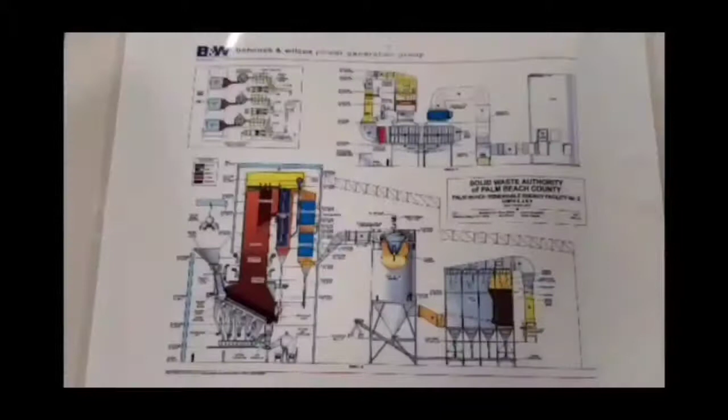Here's a diagram that we can use to explain some of the environmental equipment we have. So this is a side view diagram of our whole facility, starting with our funnel. Over here would be the pit, overhead crane, which brings in the trash, goes down into our hopper or funnel, where it's gravity fed down into our boiler.

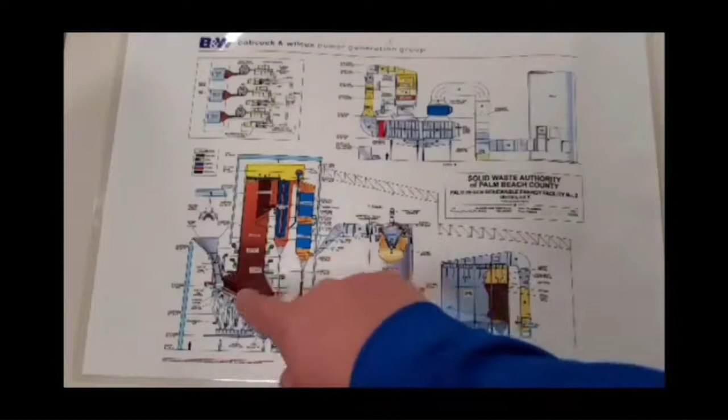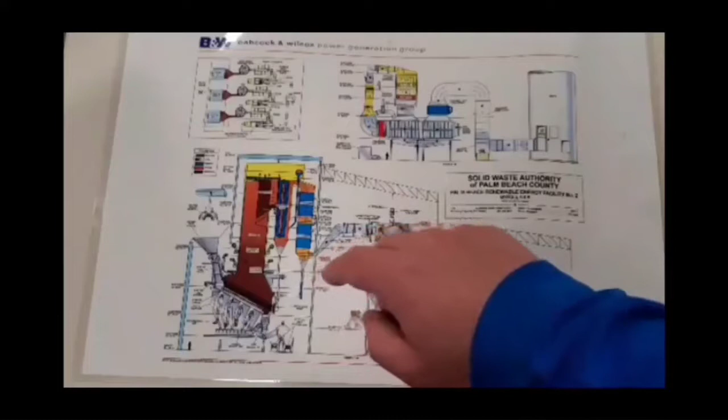And then in this general area here, we have our 2,500 degree fireball where we're combusting waste. We bring air from the tipping floor in underneath to provide the oxygen necessary for the fire. And then that heat and flue gas makes its way through these different passes and turns through our boiler, all while we're absorbing the heat from that flue gas, from the hot air being generated from the fire, through the metal piping in the walls, which is then boiling water and making electricity.

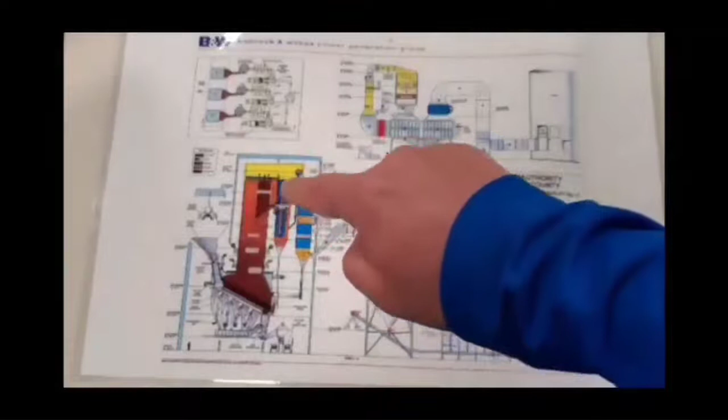All of the ash that's left over comes out here and is collected into our ash system where we can bring it to landfill, safely landfill it. If we follow the path of flue gas, we can see that it goes through here. Again, we're collecting the heat from it and eventually going through this portion of our equipment. From this point on, all of this equipment is environmental. It's all there to deal with what pollutants are generated when you burn trash.

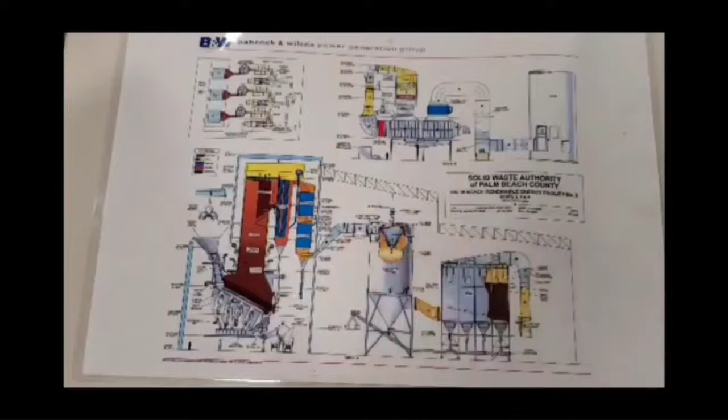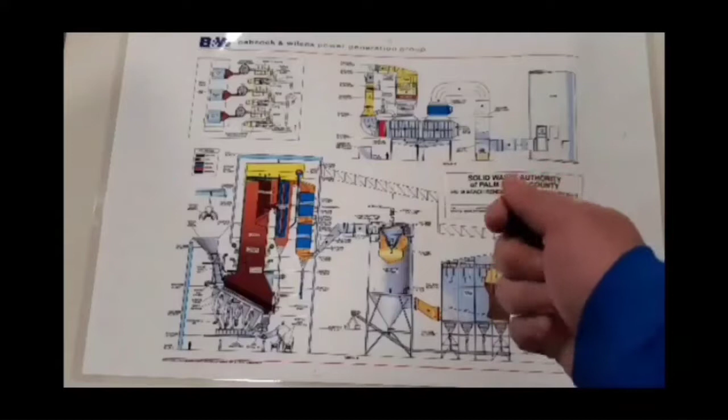So one of the first things we do is we inject a powdered activated carbon, which binds with mercury, so that we don't release that into the atmosphere and it can be safely landfilled. After that, it goes into our SDA, which is basically a big cylinder, and inside there is a fast spinning nozzle, kind of like a fancy sprinkler system. And what it does is it sprays in a lime slurry mixture, which is a basic element. So it has a basic pH.

And the acid gases, which are what's responsible for making acid rain, when you take something basic and acidic and you put them together, they neutralize each other. And that's what we're trying to do in here. So we're lowering the temperature of the flue gas. We're injecting lime slurry to neutralize acid gases.

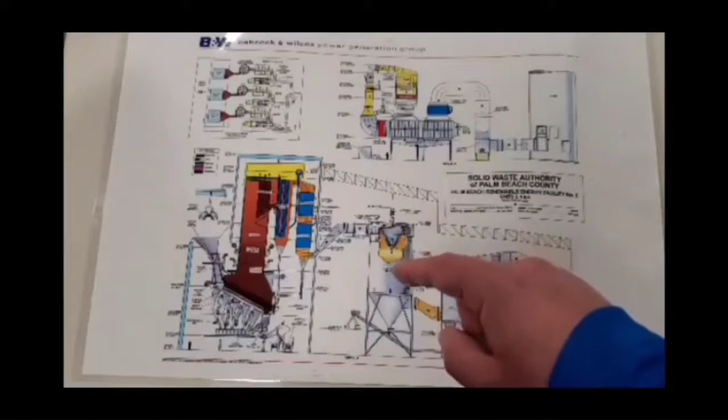And then from that point on, we're moving in and we go into our bag house. So this whole thing here is like a giant oversized vacuum cleaner. It has 8 compartments. Each compartment has... in total we have over 1,700 of these bags, and we'll show you a bag later on in another video.

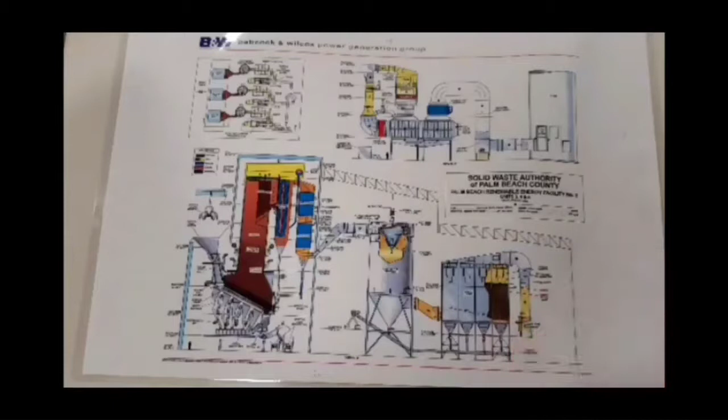And those bags are 2 stories tall, and they look like big cylinders. So the air gets pushed through them, similar to how a vacuum cleaner works. So any particulate that's in the air would get trapped by the filter and the clean air then passes through and continues on through the system.

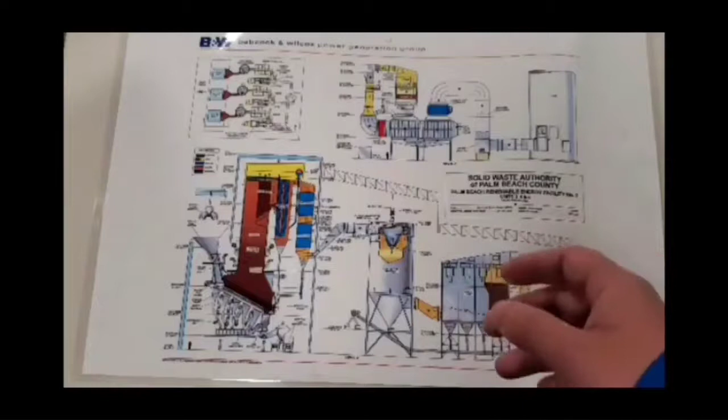As enough ash is generated and collected on the sides of those bags, they get kind of plugged up and the air can't push through as easily, so it creates a differential pressure, and we can measure that, and when it gets too high we initiate a clean, so it will reverse the airflow, and we'll fire sonic horns, which are like giant subwoofers, and that vibration from the noise helps shake the ash off, where it goes down into these individual hoppers and again joins the rest of the ash.

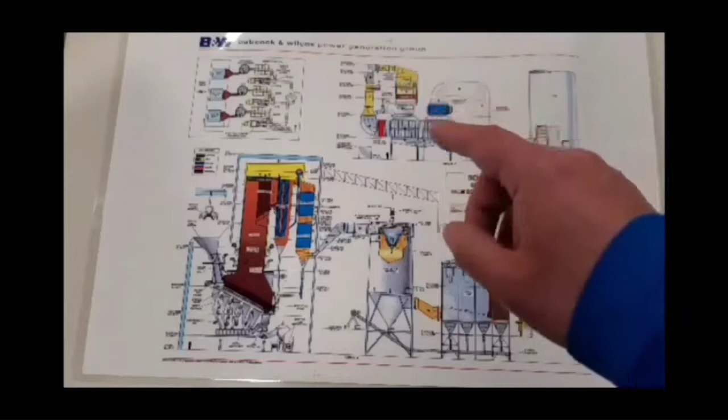After that, it goes through some ductwork and ends up into this section over here, if you can imagine the connection. And this is our catalyst system, which is unique to our facility. We're the only waste-to-energy facility in the country to utilize this. Very good, newer technology. It helps make us the cleanest waste-to-energy facility in the country.

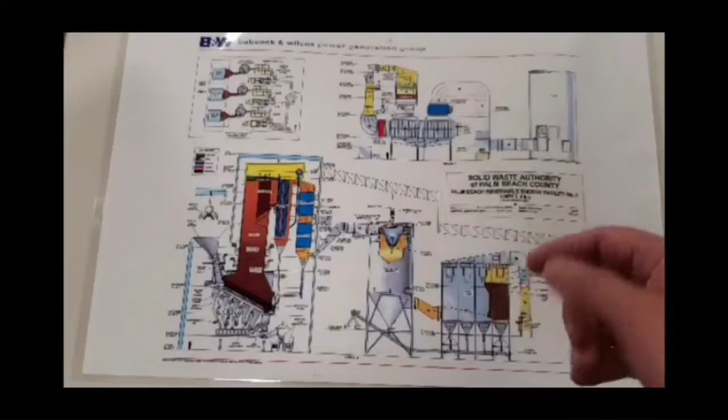And what we do is we spray in an ammonia gas, which mixes with the flue gas and goes through a catalyst, which is a special kind of metal in the shape of a honeycomb, vanadium metal, and some chemical reactions take place. And what we do is we break nitrogen oxides, which are dangerous to the environment, and we break them down into water and nitrogen, which are naturally occurring and not harmful to the environment.

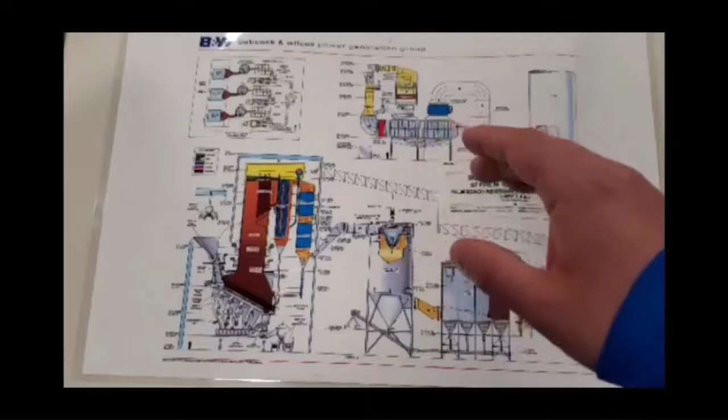So after it goes through there, we go through some series of heat exchangers just to try to recover some leftover heat and make the boiler a little bit more efficient. And then the last step we go through is our CEMS, or Continuous Emissions Monitoring System, which is a computer which takes a smell, so to speak, of the air that we're putting out of our stack 24/7 and makes sure that we're not polluting. And that gets checked by a third party in the Department of Environmental Protection to make sure that all of this stuff is working properly.

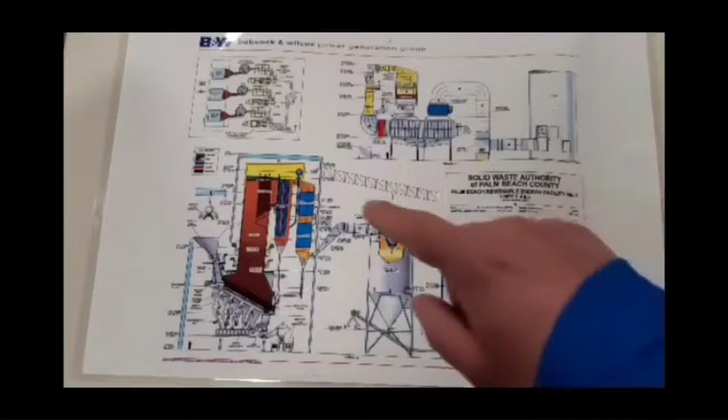And again, just up here in the corner, you can see that we do have the same exact setup 3 times. So 3 boilers, which means we need 3 sets of environmental equipment, and they're all identical. Great. So we'll go out in the field and we'll look at some of these things in person and see what they look like in real life. Thanks.

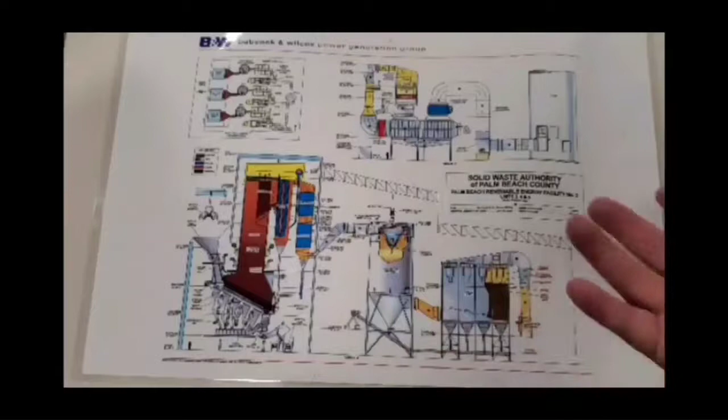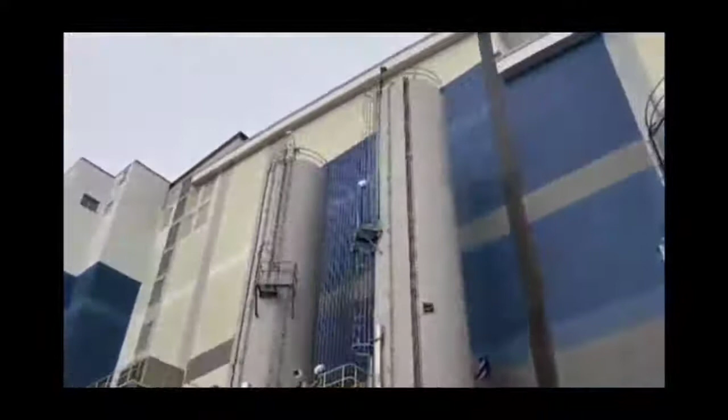All right, guys, so here's our chemical storage area for the facility. So as I said, we use some chemical reactions to take place to address some of the environmental concerns here. So first up here, we've got 2 silos, as you can see, very tall, that store lime pebble, and we then generate it into a lime slurry.

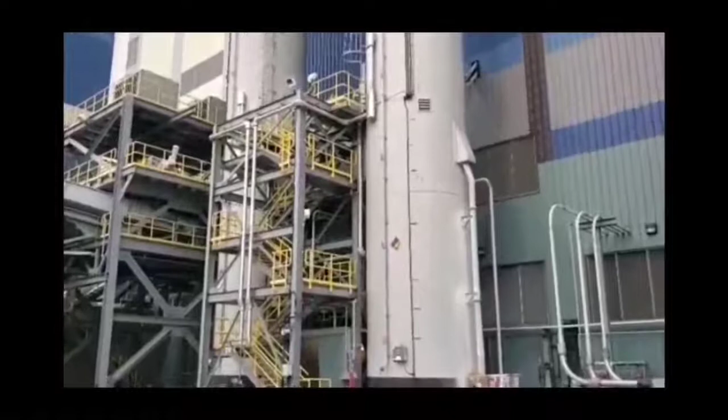So the top portion of these silos are filled with lime pebble, lime rock that looks kind of like gravel, and then about midway up where that platform is, we have a piece of machinery called a slaker, which takes that lime pebble, mixes it with water, basically agitates it, stirring it, and creating lime slurry. So we have a chemical reaction taking place to create lime slurry. And the bottom of these are lime slurry storage, which is a liquid now, where we can then pipe it up to those SDAs we looked at earlier, spray it in, and knock out those acid gases.

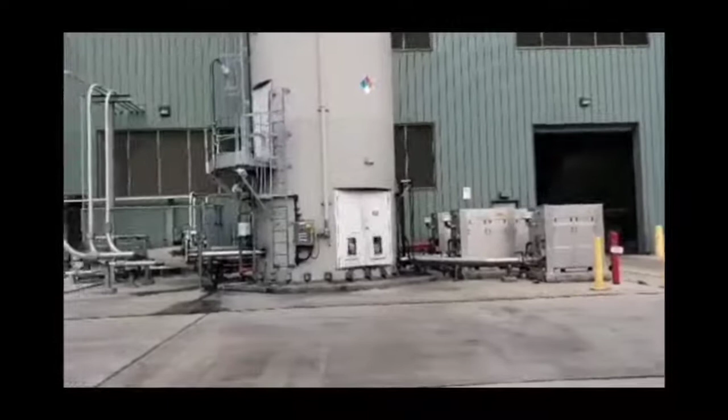Next up over here, this is our carbon silo. So this is where we keep our powder activated carbon, and then we use some air compressors over here, and we actually blow that up to the top portion right before the SDA, where it can be spread evenly across the whole stream of flue gas and bind with any mercury that would be in there.

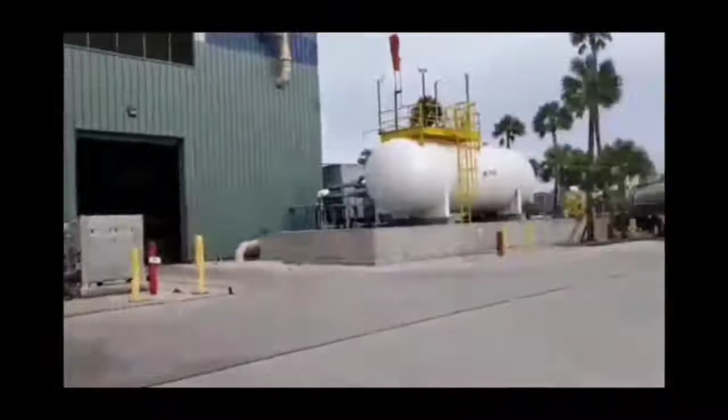And then last up here is our liquid ammonia tank, where we take that, eventually we heat it up into a gas state, and then spray that into the boiler, mixing with the flue gases, and eventually making its way through our catalyst and reducing nitric oxide emissions.

Okay, guys, so first thing up on the list, we're going to talk about our SDA. That stands for Spray Dry Absorber. And this is that long cylinder I spoke about, and that goes all the way down to the floor, and it's got some turning vanes in there that create a twisting action.

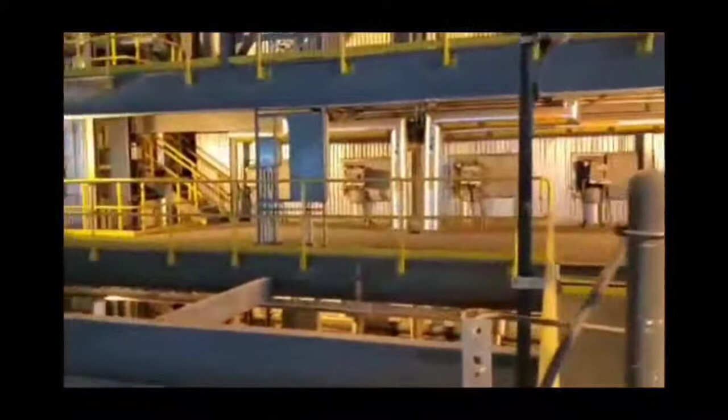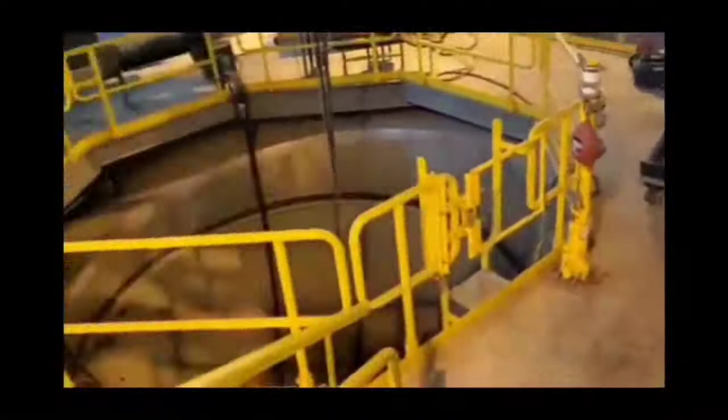If we look over here again, here's all of our boiler and combustion equipment. Here is the ductwork where those flue gases that are generated come in. We inject powder activated carbon to mix with mercury. After that, it goes into our SDA, in through the top here. It spirals around in a big circle into the bottom of this cone, where there is one of these rotary atomizers, which spins down here at the bottom.

This portion spins very, very quickly, spitting out the slurry, lime slurry, and breaking it into very, very small droplets so that we can have the most surface area to have the best chemical reaction. Again, we're taking a basic lime slurry and mixing it to combine with the acid gases to remove them and

neutralize them. After that, it goes into the SDA vessel, which again is this big cylinder all the way down to the floor, and then cools the flue gases a little bit, and then moves on to our fabric filter. And we'll talk about that next.

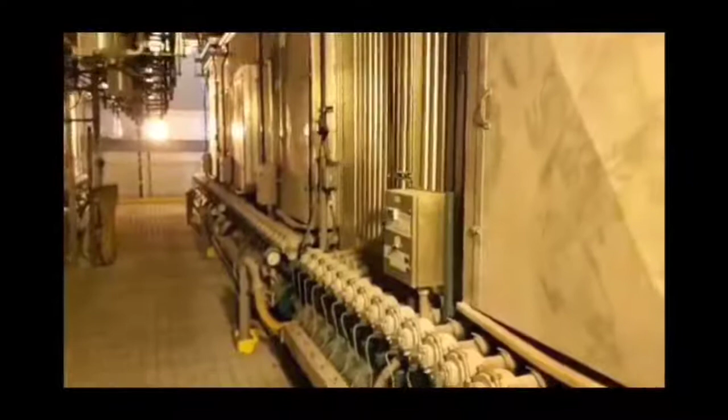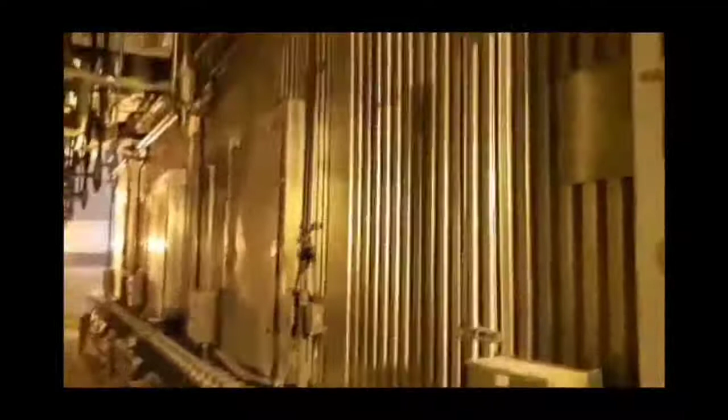Okay, so here is our fabric filter or bag house. As you can see, there's 4 compartments on this side, 4 compartments on this side for a total of 8 compartments. And what we do is inside, behind this door, we have a total on each of these 1,700 plus fabric filter bags. I'll show you a video of them shortly, but they're 2 stories tall. They hang from the top of this all the way to the bottom.

And what we do is we force the air to go through those bags, acting as a filter membrane, taking all of the particulate matter out of the combustion gases. So as the flue gas comes through, there is small particles of ash that are still being brought through the air from the current of the air moving. And that's what gives smoke its color or opacity.

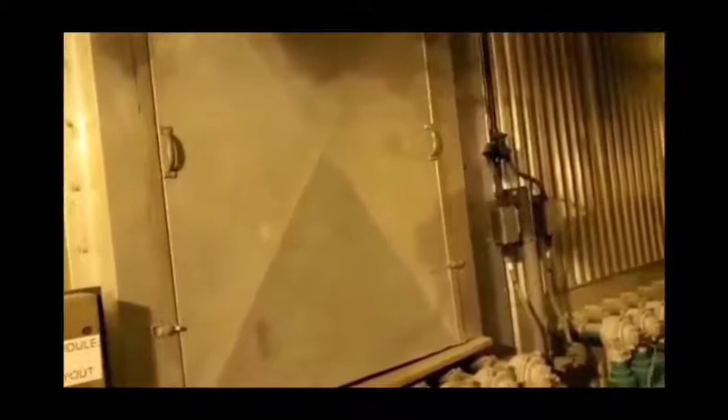If we are able to take all the ash out of that hot air, then it would be basically invisible, right? It would just look like normal air, just be hot. And that's what we're doing at this point. So we're taking all of that particulate matter out of the air to make sure that we're not blowing ash out into the atmosphere. And these are fully automated cleaning cycles.

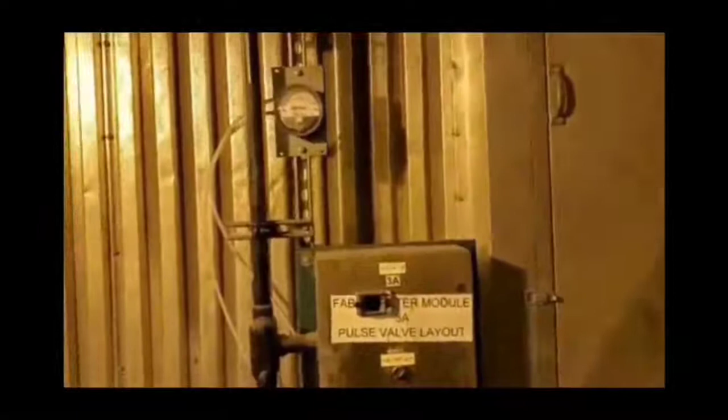So as the bag gets fouled, a lot of ash gets trapped in there. The differential pressure will increase because it will be harder for the air to move through the filter as it's dirty. And that will generate an automatic clean where we reverse the airflow, and we'll have some sonic horns fire, like big subwoofers, making vibration, sonic waves that will knock the ash off, clean those bags, and we can repeat that cycle over and over and over. All right? Great. Thank you.

So what happens is, basically, we force the air to go through this bag. Right? And then this whole bag, the whole material, becomes one big filter. So as the flue gas gets pushed through, these tiny little pores, very, very small, trap all of the particulate or all of the ash that's in the air. And then that allows us to put clean air out into the environment. Again, each one of these units has about 1,700 plus bags, and they're about 2 stories tall each.